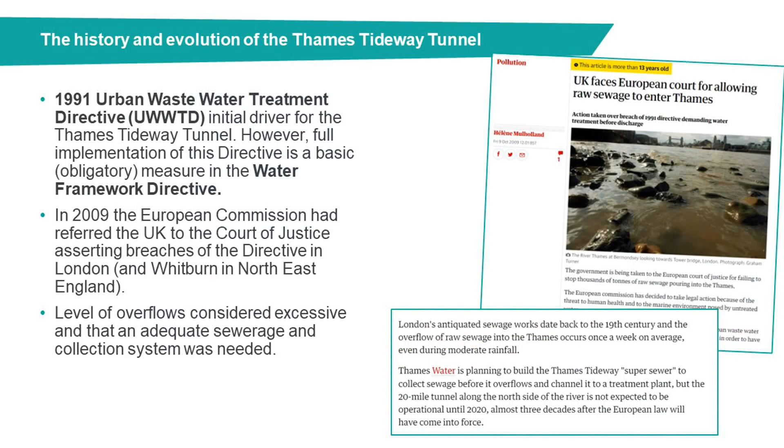So why were we set up? Why was there a need for a super sewer? Well, in 1991, the Urban Wastewater Treatment Directive was the initial driver for the Thames Tideway Tunnel. In 2009, the European Commission had threatened to take the UK to court and give them a substantial fine unless they were going to deal with the problem of being in breach of the Urban Wastewater Directive.

The level of overflows were considered to be excessive, and before I came here, I just did a Google search to see if that history was still there, and of course, everything is always still available on the internet. So that article was from 13 years ago, just at the time when the UK was about to be at risk of fining. And as you can see, the Thames Tideway super sewer was already deemed to be in its planning stage and a solution to the problem.

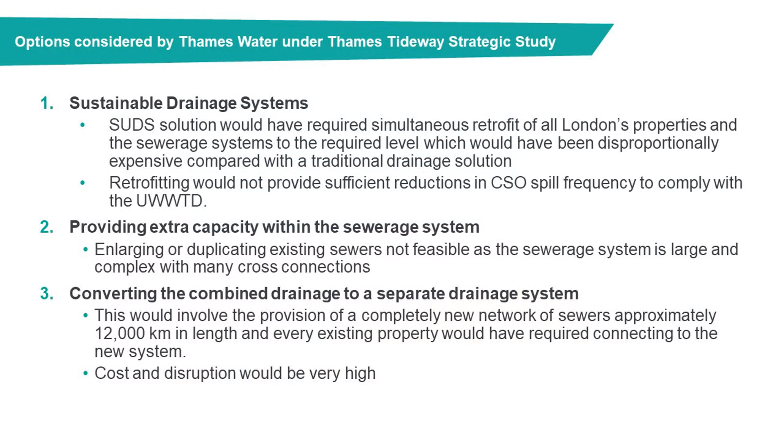But we had to go through a number of optioneering, and it has often been said, why did we choose what we chose? Well, I'll just take you through what the various other options were. First option that we looked at was sustainable drainage systems. So these are swales, wetlands, just taking away some of the hard standing from London and using them as a solution so that there would be water infiltration. So that would be dealing with the rainfall issue.

But it was considered to cost disproportionately more money in order to do this, and with London being a very historic city, it would have taken a lot of time and a lot more disruption and significantly more cost to undertake a SUD system. We could also provide extra capacity within the existing sewage system, so just upgrade it and increase the existing sewage system as it is. But again, with all the utilities and everything else that was associated with that, that also wasn't considered to be a suitable option.

And then also the final option was to convert the combined drainage system into a separated system. So have a separated system running alongside the current system, and again, that wasn't deemed to be, within a very congested city, the right option for us. So our solution was that it was inappropriate to do nothing, and in 2007, the UK government concluded that the Thames Tideway Tunnel was the preferred solution.

And there is a very interesting book that has been written about it by a former colleague on the Thames Tideway Tunnel and how the whole planning process was developed. But that's just an example of the timeline there. So back in 1991, we were at risk of being in breach. We then undertook the Tideway Tunnel strategic study, which came out with those 3 different options.

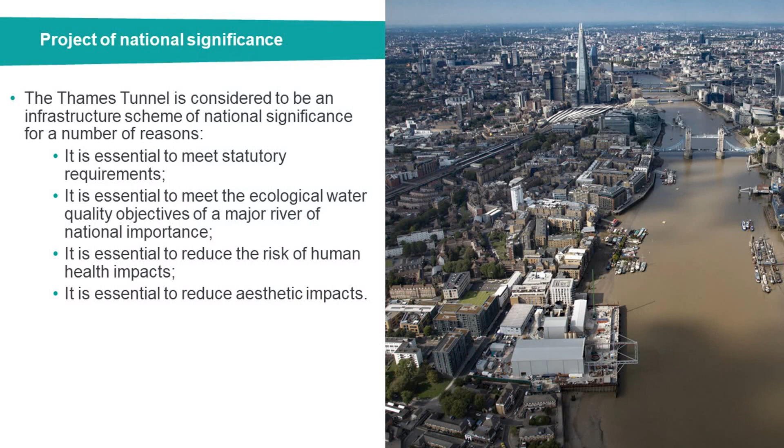So the project is deemed to be a project of national significance. It was essential to meet the statutory requirements. It is essential to meet the ecological water quality objectives of a major river, and also to reduce the risk

of human health impacts, because we have a lot of users of the river, people that row on the river, swim in the river as well, and as I understand it, when I've spoken to rowers, even the littlest bit of water, if that splashes up to them while they're using the water, that can cause them to have sickness, and also to reduce the aesthetic impact.

So that's sewage-derived litter. That's everybody that's putting wet wipes, earbuds, and everything down into the system that creates the blockages within our system and then comes out onto the foreshore. And we see these big mounds of wet wipes on our foreshore.

You think that's the natural topography of the foreshore, when in fact, when I have been down there doing a foreshore pick, you will pick it up and it's just congealed with wet wipes. So that is going to help to stop all of that pollution on our foreshores.

And I would say that arguably the Thames Tideway Tunnel is even more important today than it was when we were granted planning permission. It's a solution that will alleviate more than 95% of the worst sewage going into the River Thames.

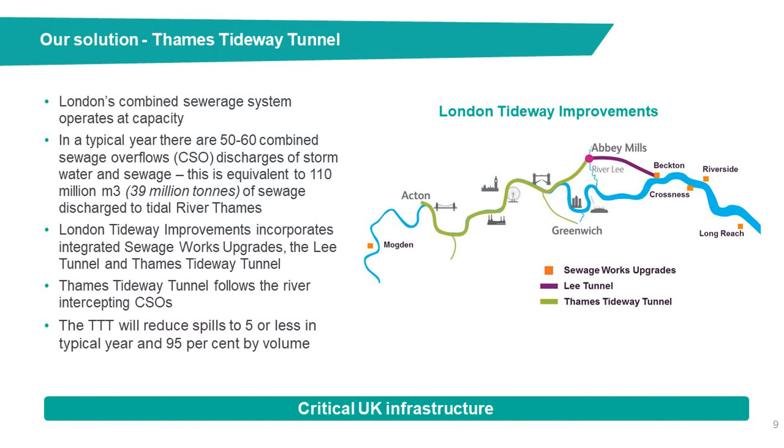But what is our solution? Our solution is part of 3 separate solutions. So I'm talking about the Thames Tideway Tunnel today, but we have really taken this as a 3-pronged approach. So in a typical year, which still exists today, there's 50 to 60 overflows of CSOs, combined sewer overflows.

These are literally circles in the river walls that expel sewage into the river. And that's equivalent to 110 million cubic meters of sewage discharged into the tidal River Thames. So as part of the London Tideway improvement works, it includes upgrades to the sewage treatment works that you can see on the map there, which have been undertaken by Thames Water.

It's also included the Lee Tunnel, as the Abbey Mills CSO has been one of the worst polluting CSOs within the whole of the River Thames. And that Lee Tunnel is intercepting that CSO and taking it for treatment at Beckton sewage treatment works.

And then Tideway is this 25-kilometre tunnel running from West Acton, following the route of the River Thames until it branches off in the east under the Limehouse Cut, and then connects up to the Lee Tunnel and then on to Beckton from there. So the London Tideway improvement works is 3 improvement works. The sewage works have been undertaken already, as has the Lee Tunnel, and so the final element to it is the Thames Tideway Tunnel.

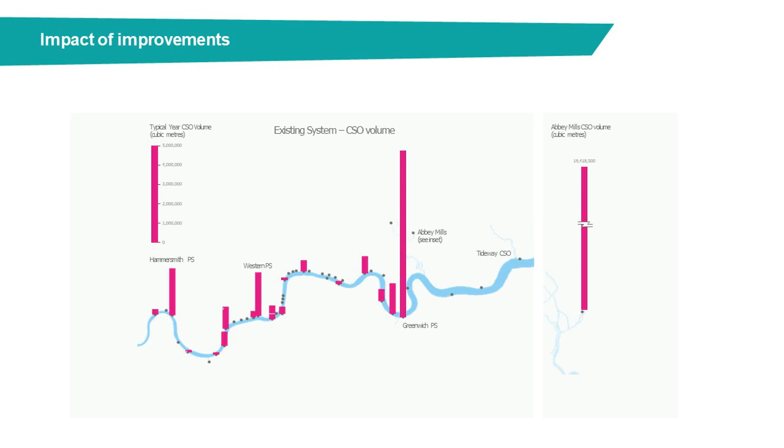But before any of that, this is just a graphic of the millions of cubic meters that were going into the tidal River Thames before any of that work took place. So this is before the sewage treatment works and before the Lee Tunnel. You can see that Abbey Mills there, which I spoke about, is over here.

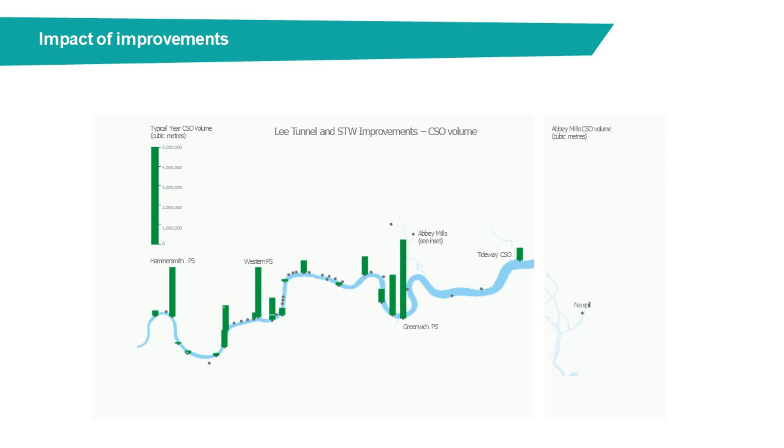That was one of our worst polluting CSOs, and also at our pumping stations in Hammersmith in the west and the Western Pumping Station, and this is Greenwich within East London. Onto that, you overlay the Lee Tunnel and the sewage treatment works, and you'll see that there's significant reduction across the piece of raw sewage going into the River Thames.

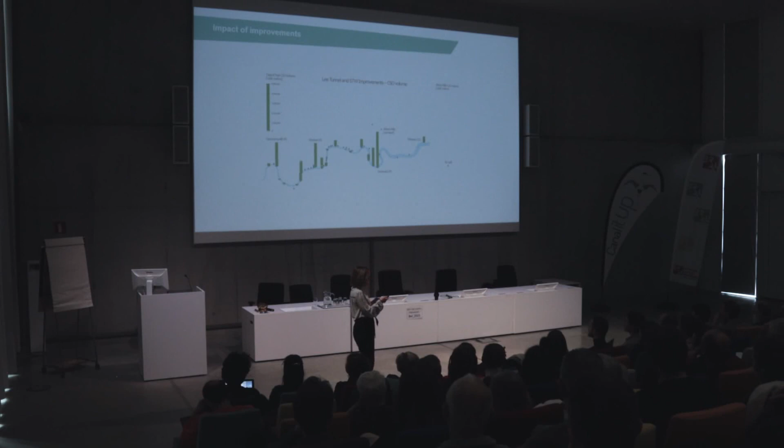And as you can see, with the Lee Tunnel in place, there is currently no pollution going into the River Lee because of that Lee Tunnel. So that has been a really great success story.

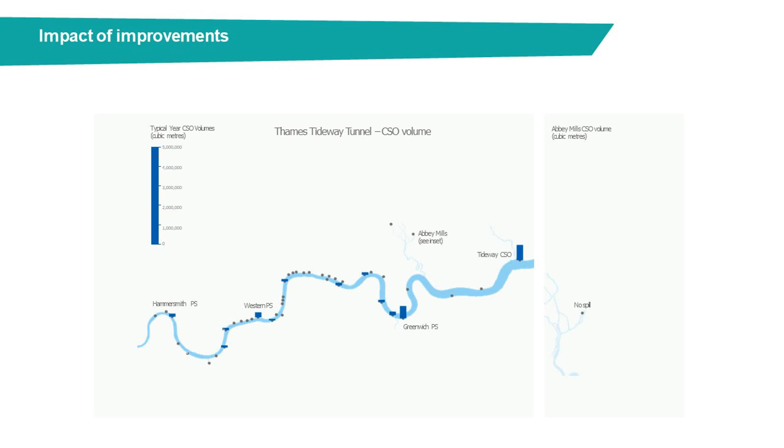Lay on top of that the final element, which is the Thames Tideway Tunnel, and you'll see that we still do have some discharges, but it's obviously being significantly reduced. So we do still expect to have some spills, around about 5 a year in an average year, and with climate change, we think that that may increase possibly to around 8 times a year.

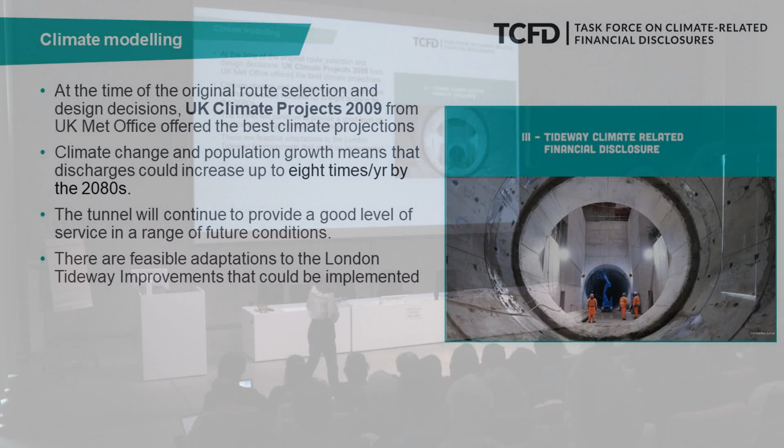And just to talk about climate change, we did an awful lot of modelling on the future climate predictions based on increased rainfall against the UK's Met Office climate predictions of 2009, which were the best climate projections that we had at the time. And even looking at the current, more up-to-date climate projections, we're still expecting that it will service us appropriately around 8 times per year up to 2080.

We have responded as an organisation to the Task Force on Climate-Related Financial Disclosures. We do think that our tunnel will be fit and resilient for future climate predictions, and that it has been sized appropriately and adequately to take the extra impacts of increased and more frequent rainfalls, more intense rainfalls than we're seeing at the moment.

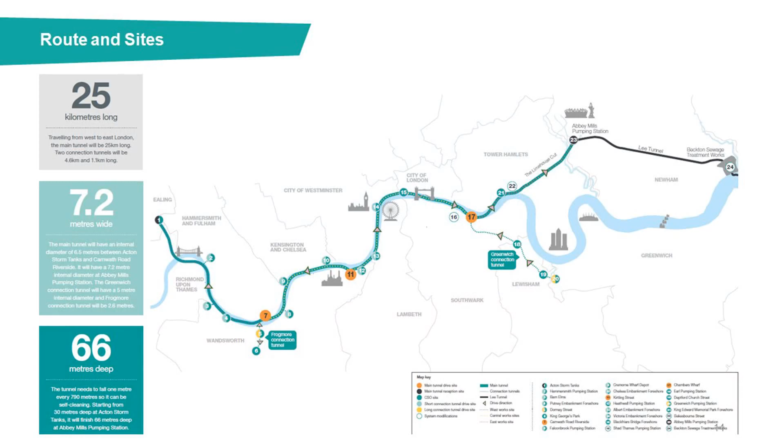And in a bit more detail, so our tunnel is 25 kilometres long, running from West London right the way through central London. You see the Houses of Parliament here, and the London Eye and Tower Bridge. And then at this point here, we have Greenwich, and then it cuts off under the Limehouse Cut. It stops following the River Thames and ends up joining Abbey Mills pumping station, which then takes the sewage off to Beckton through the Lee Tunnel.

We're 7.2 metres wide, which is the equivalent of 3 double-decker buses side by side within the tunnel, and we're gravity-fed. So in the west, we are around 30 metres deep, and it's on a slow incline from west to east, and at its deepest in the east, we're about 66 metres deep. So that means that it's a really passive asset in operation.

We are a concrete tunnel. We do have an embodied carbon footprint in terms of the concrete that we've used in order to create the tunnel. But once the tunnel is in operation, it's gravity-fed, and it's a passive asset, so it doesn't need a lot of energy associated with its operation.

Obviously, you're going to have a big volume of water coming down there, and it goes down under a vortex. So the vortex removes some of that energy from the water and the sewage that's going down the shaft, takes the air out of it. We don't want any air in it because that could cause issues in the tunnel itself, and then takes it down to the bottom of the shaft there where the pressure is reduced so it doesn't cause any force onto the base of the shaft there, and then takes it off into our tunnel itself. So all the way along the 25-kilometre route, we've got a number of these shafts where the CSO is intercepted down into our low-level tunnel underneath.

It's also deemed to be a self-cleaning asset. So in terms of health and safety risks, we don't want anyone to go down there unless we absolutely need someone to go down there to do some repair work. So we are looking at how we may be able to monitor it using some sophisticated systems, like autonomous systems that will be able to scan the tunnel and see how it's performing. But it is self-cleansing. It is supposed to need minimal maintenance. Above ground, as I'll show a bit later, we've got some new areas of public realm, and within those areas of public realm, we'll have kiosks, which is where all the mechanical and electrical engineering equipment will be held.

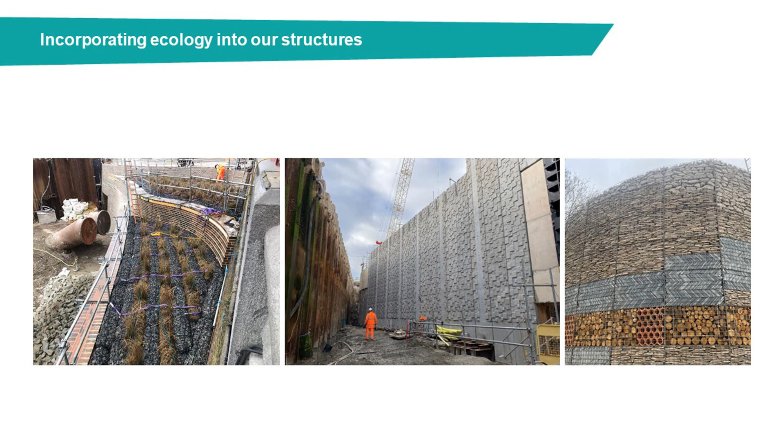We are also incorporating ecology into the construction of the asset. So here at our Chelsea site, you will see that this is reed beds, and this is going to be floodable. So, creating ecological habitats within the river structures that we're creating. This is a new river wall, and within that we are creating micro-habitats for invertebrates and other fish species and marine life to live in.

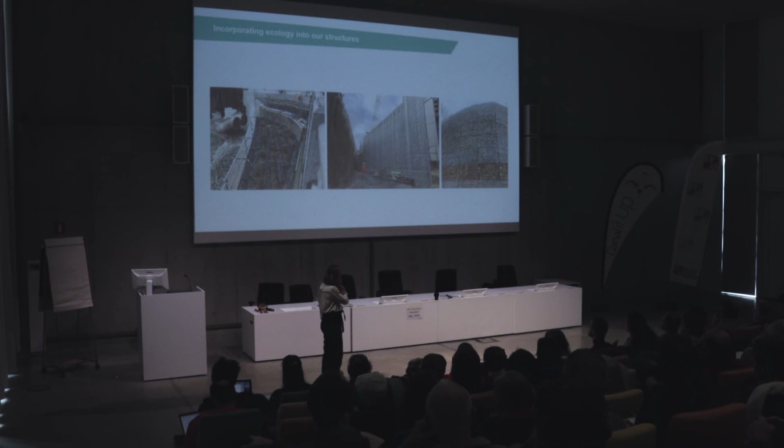And this is a kiosk in our Barn Elms West Centre, western end of the tunnel in London. And what we've done there, we've clad it in slate. All of our kiosks, although you can't see it here, do have brown roofs on them. And here we've got a bug hotel. So we are hoping that being really sensitive to ecology in all of our above-ground structures, as well as our river wall structures, will help to also improve biodiversity.

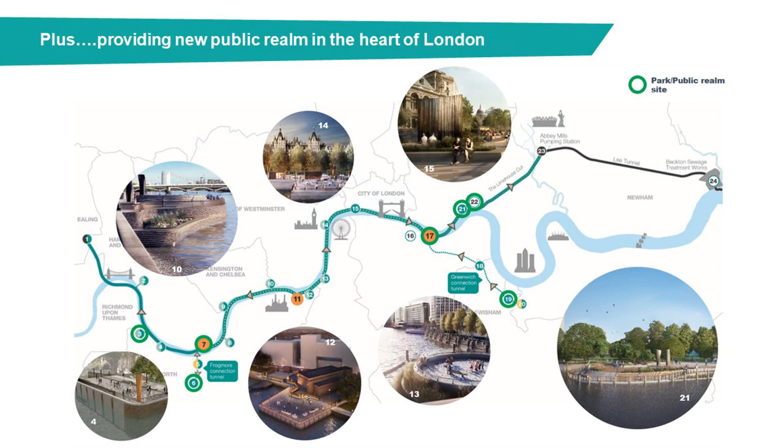But one of the key things that we're leaving for London is not only improved ecology, a reduction in human health risk days and better water quality, it's 3 hectares of new public realm for London. It's really unusual to be able to create new public realm for London, and we're creating 7 areas of new public realm right into the river.

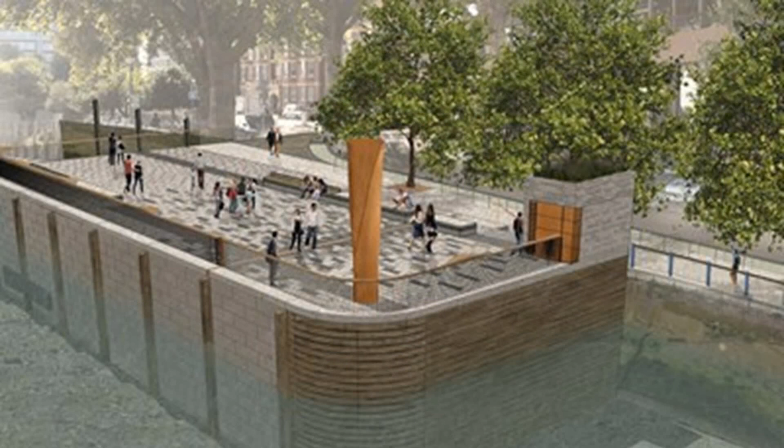So this is Putney. Putney is a really important site for us. It's the beginning of the Oxford to Cambridge boat race, and this is the new bit of public realm that will be created at the start line for the boat race. Within each of our public realm areas as well, we have public art installations which tell a story about the local communities in which that public realm is being constructed.

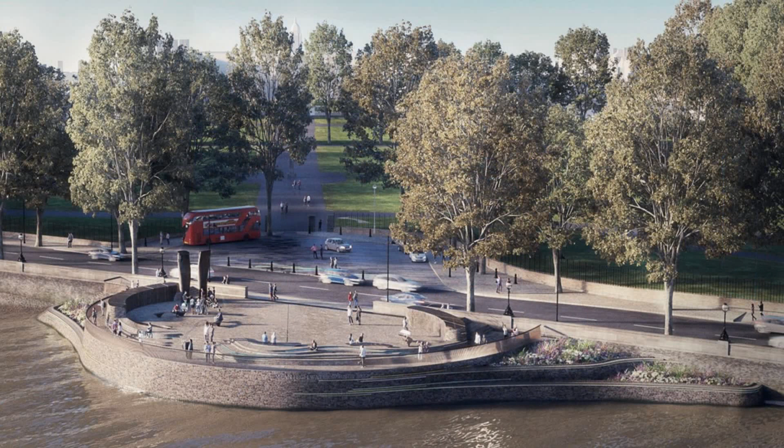This is Chelsea, so this is opposite Chelsea Pensioners and the Chelsea Flower Show. So what we try to do here is we've got some artwork along here in the way of colourful bricks, which ties into the Chelsea Flower Show. And this will all be floodable here. So this is where we will be creating floodable public realm and wetland areas for species and wetland habitats.

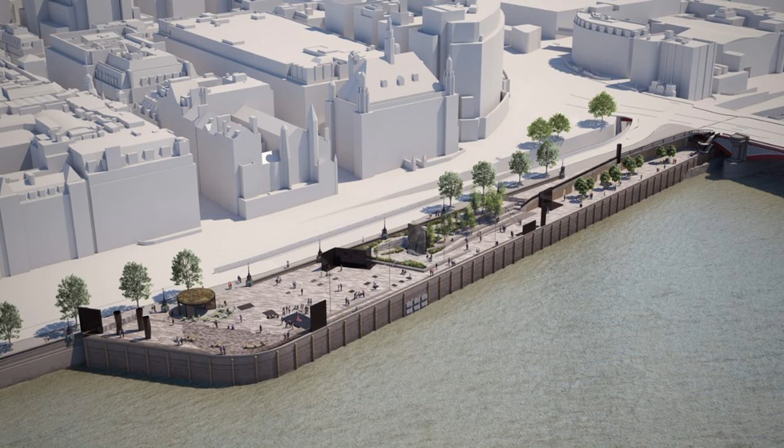Blackfriars is a key central London site and one of our biggest. And here you can see the kiosk with the brown roof on top. And this area never used to exist. We've had to reclaim some of the river. But in reclaiming part of the river, we've tried to create public realm spaces that people can use in many different ways, but also just to have that greater connection with the River Thames and learn more about the River Thames. And that's just the same site, but down at the walkway level.